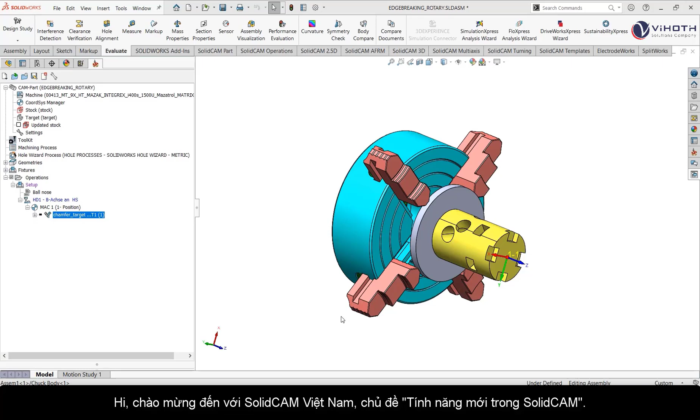In this video we will see what's new in SolidCAM, the new version where we have edge breaking as a new feature. In this part we are going to use the 4-axis version of the edge breaking cycle.

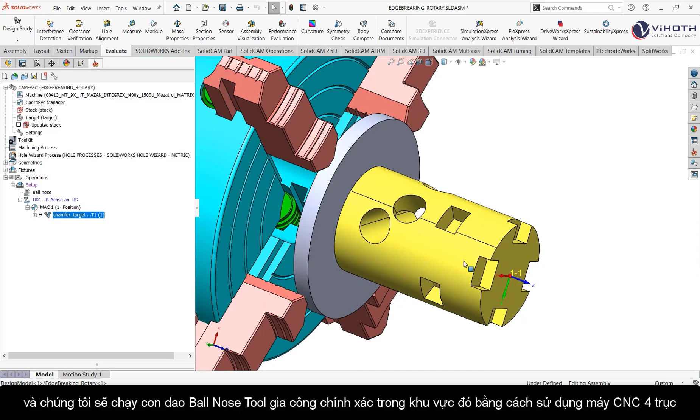As you can see, there are many features in this which have been finished and have a sharp edge on the top where the burr is likely to be formed, and we're going to use a ball nose tool to find the edges that need deburring, and we will run the ball nose tool exactly in that region using 4-axis. Let's look at the toolpath.

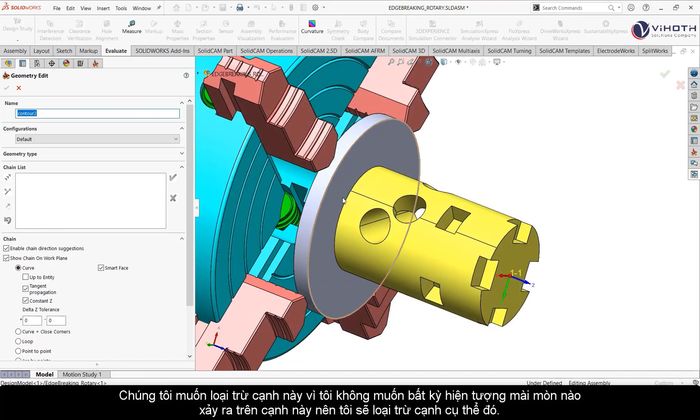So we have the geometry, in which the geometry is the entire target that we have selected, and edges definition is selected as auto detect. We can also do manual definition of edges, and we would like to exclude this edge because I don't want any deburring to happen on this edge, so I will exclude that particular edge.

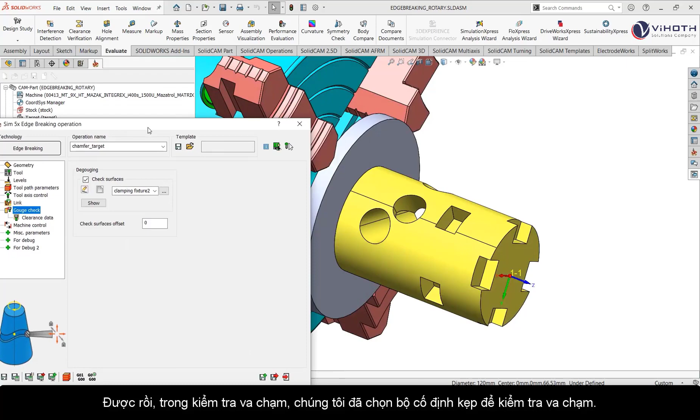The tool that we are using is a 6-diameter ball nose tool, and in the tool axis control you can see that it's a 4-axis toolpath with the rotary axis around Z-axis. Alright, and in the gouge check we have selected the clamping fixture to be selected for collision checking.

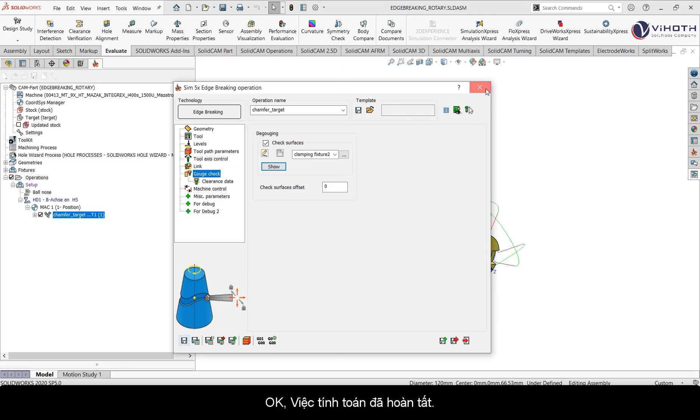Okay, so if I select the clamping device, this clamping device, the chuck with the jaws, is selected as the gouge check surface. So I'm going to save this and calculate this toolpath. Okay, calculation is done. Let's look at the resulting toolpath.

You can see that the tool is running around all the edges where there is a sharp corner, but this is done only in pure 4-axis. Let's look at the simulation in machine simulation.

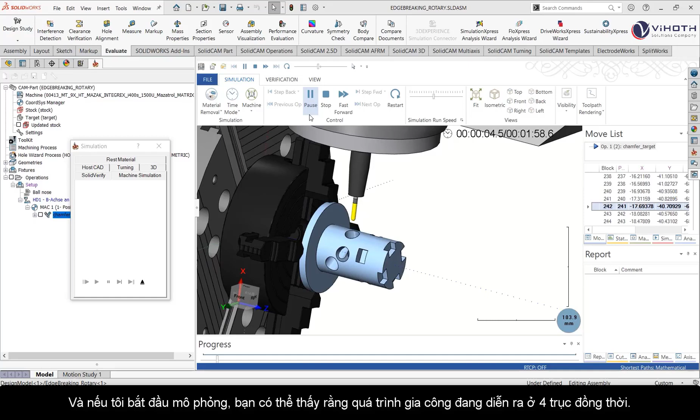This particular part is mounted on an Integrex machine. So I have the head here, the part and the chuck mounted on the main spindle. And if I start the simulation, you can see that the machining is happening in perfect 4-axis. It moves to the next region, completely checked for collisions.